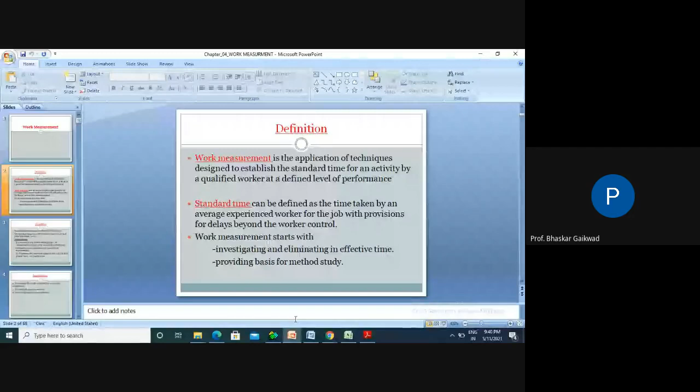At the same time, if you want to change any method of producing from raw material—like the method of manufacturing forging parts, casting parts, rolling parts, press tooling parts, etc.—if you want to change that method, here too we require certain time studies. If we save certain time, ultimately the manufacturing cost will get reduced. So this is actually the scope of work measurement and the need for time standards.

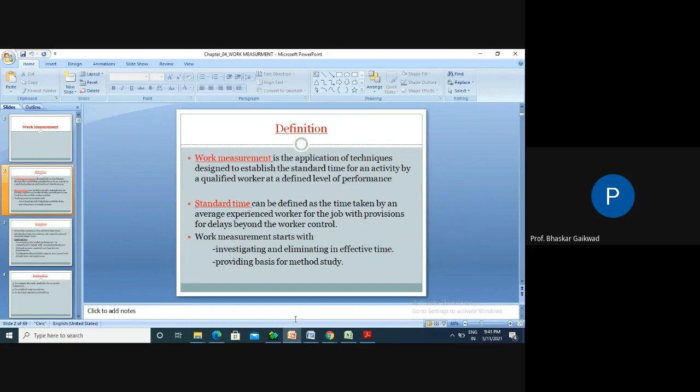Whatever explanations I have given comes under the objectives. The first objective is to reveal the existence of ineffective times, if any. Ineffective times means waste times in production which we can reduce by work measurement.

Different types of online or offline interviews will be there. In that, questions will be there. So what is actually the need of work measurement?

The main need is to decide the standard times and eliminate the ineffective times if there is any. Then second, set standard times for carrying out specific jobs and standard output levels.

So suppose you are doing any bush, rollers, pins, or shaft etc. What should be the standard time for manufacturing jobs? Suppose we have calculated 1 hour. Now within this 1 hour the job has to get complete. If it does not get complete, there is a problem with the worker or a problem with the machine, and that we have to find out. So anyhow, whatever standard time we have decided, within that standard time our production has to get complete. This is the second objective of work measurement.

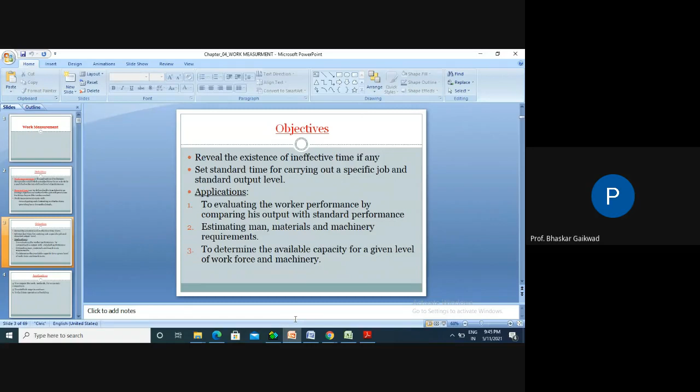Third, to determine the available capacity of a given level of workforce and machinery. The capacity of our industry or our workshop we can justify using this. Suppose any order is there for a number of shafts, and we have some standard time calculation. Then for 100 shafts, how much time is required? We will calculate that, and that is nothing but the capacity of that shop floor. These things we get through work measurement.

Then fourth, to compare work methods for economical comparison. So many work methods are there: maybe machining methods, forging methods, casting methods, pressing methods, or fabrication methods. So we can compare all these methods on the basis of economic criteria.

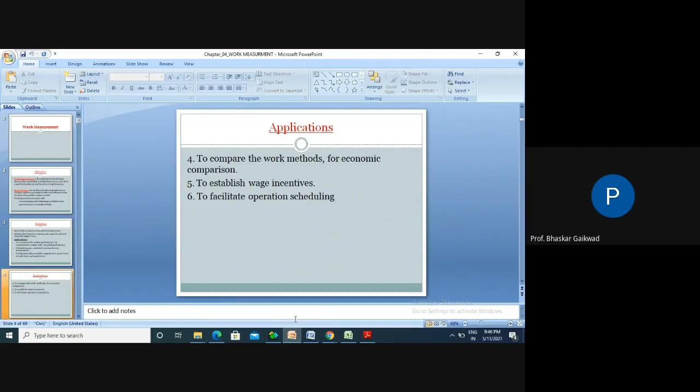Now fifth point, it is very easy to decide the incentive scheme, bonus scheme, or daily wage systems, we can make use of work measurement. Then sixth, to facilitate operation scheduling, meaning production planning and control. It is very easy if we have the work measurement technique, then production planning and control becomes very easy if you use these work measurements.

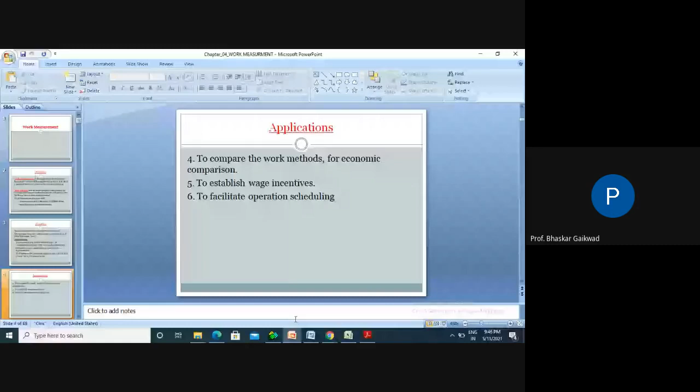Then, where to apply work measurement? It is widely used where work or part of work is repetitive. Mass production is there, repetitive means mass production. So three general criteria are there for measurable work.

First criteria: work should be identified in terms of the number of units produced by workers. So quantity here is important. Suppose we have decided the standard time, and within that time how much quantity we are going to manufacture, these things we will get.

Then second, work should be performed in a reasonable, consistent manner. There should be consistency, meaning within the afternoons or before afternoons, the same quantity should be there. Consistency in manufacturing. Volume of the work should be justifiable to perform the study and keep records.

We can justify the volume within 8 hours. How much volume will there be within the next shift? How much volume are we going to produce in the third shift? So in total, monthly, how much production volume will there be? We can justify this with the help of work measurement.

Now, the next part: the basic procedures for work measurement in industry. Suppose you are going to select any job in any industry; we have to select the job for study. After that, all relevant data related to the job is recorded with the elements of work. Suppose a job has a number of operations, maybe machining, casting, or forging operations. Whatever the present manufacturing process is, you have to record it.

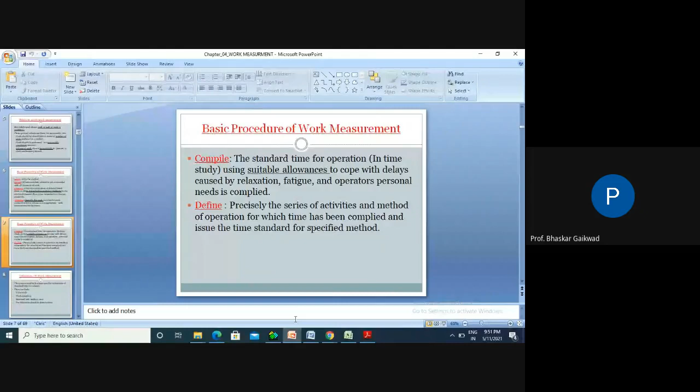Up till now we have gone through the definition, the objectives, and the basic procedures. Once again I will repeat the core concept of work measurement. Whatever is going on in the industry, it converts that work into standard times, because standard times are decided on the basis of a qualified, experienced, highly efficient person, and we compare this with other workers and expect the same time for all.

Okay. If the standard time is there, it is definitely very easy for production planning and control, cost reduction, inventory control, deciding future delivery dates, and the capacity of the plant. It is very, very important. So this is what we have seen up till now.

Next in work measurement, what are the techniques of work measurement? There are several techniques used for estimation of standard times in industry. These include time study, work sampling, standard data methods, and predetermined motion time systems. So four methods are there. Time study means we can directly use a time study watch, maybe flyback or cumulative types of watches, for measurement. The observed times we note down; this comes under time study.

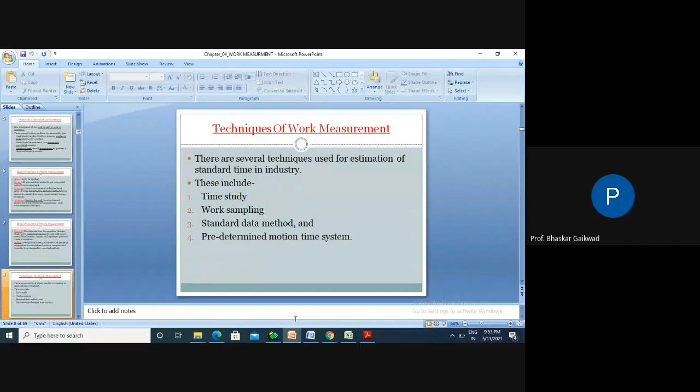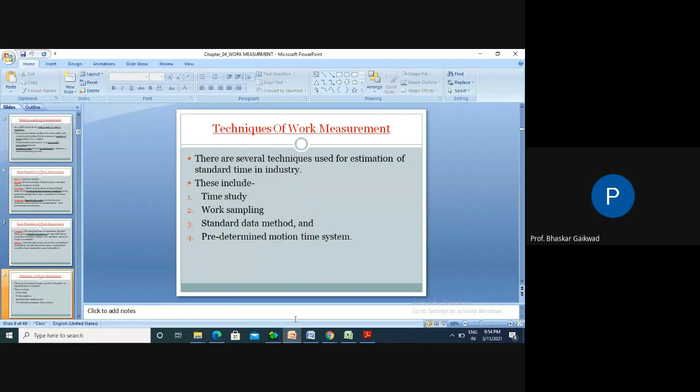Predetermined motion times means for particular motions we decide certain times, for grasping, how many seconds are required. Then after grasping, we move it and put it in the next place, how much time is there. So your hand movement or arm movement or the movement of any part of our body while working, how much time is required, we have to decide, and the same times we use again for the same types of motion activity.

Second, it is used to estimate the times to be allowed to a qualified and well-trained worker working at normal pace to complete specified tasks by using specified methods. Once again, the repetitive word is there. Always you have to remember standard times. It has been calculated on the basis of the workers' and machines' performance.

Which type of worker do we require here? Trained worker, qualified worker, good experienced worker, efficient workers. First of all, you have to get the work done by such a person, and the same thing we have to apply for other persons. This technique is based on measuring the work content of prescribed methods with allowances for fatigue, personal needs and unavoidable delays. So whatever is observed, performance rating is there. In that you can add certain allowances.

Certain allowance means which type of allowance? The time lost due to personal problems. Then time lost due to the fatigue of the workers. The time lost due to unavoidable delays. For example, in the machining condition or in the process of manufacturing, sometimes the delay happens due to power off. So that time also you have to consider while calculating the standard times.

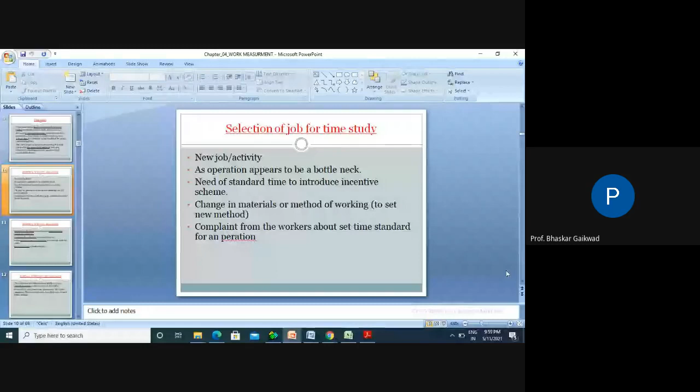The last, complaints from the workers about the set time standard for an operation. Sometimes on the shop floor there are always complaints from the workers: this is a very critical job, it is not possible to manufacture within 8 hours. Sometimes some workers feel it is a very simple job we can manufacture within 2 to 3 hours. So these opinions always will be there. So how we can normalize these types of opinions is by using this time study technique.

Then next, excessive idle times for machines or extremely low output of the machines. So suppose the manufacturing process is going on in industry, maybe a machining process, press tooling process, forging process, any process, rolling process. Sometimes there is a problem: some process is taking excessive time. So why is there actually this excessive time? If you need to analyze this, here we require the time study.

Compare the efficiency of two methods. Once again, comparison of new method and old methods. For efficiency comparison purposes, we require time study. Make preliminary investigations to carry out method study. So initially, before work measurement, there should be method study, meaning changing the old method into new methods, and while changing, time study plays a role that is

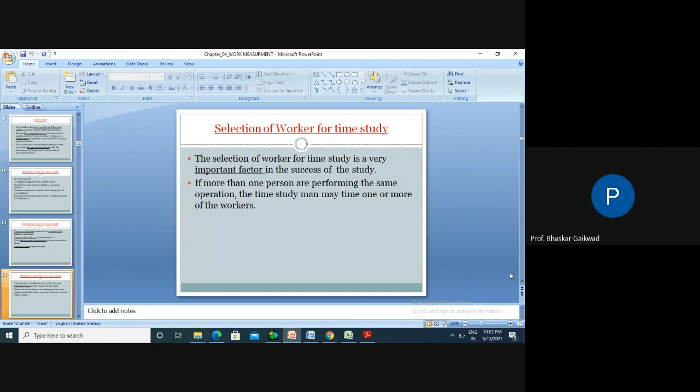The qualities in the worker on which time study should be conducted: the worker must have the necessary skill for the job. First, you can check the skill for the job. Have sufficient experience with the given method of job. So before the time study, you can get it checked. Skill is there, experience is there, average working speed is there, then knowledge of the method and purpose of study, whether that person knows or not. This is related to workers.

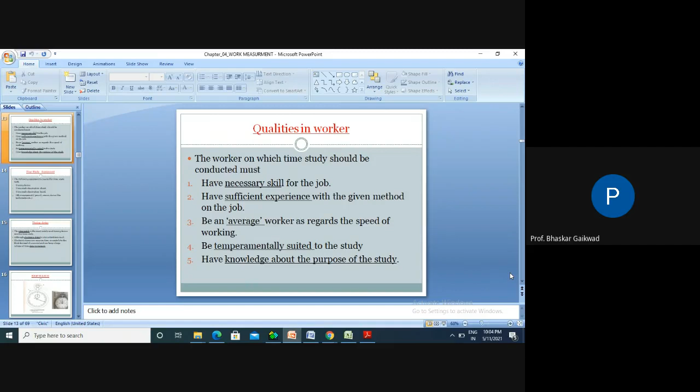Only one point here you have to remember. A time study you always have to calculate on the basis of a qualified, experienced, skilled person at 100% performance. On the basis of this, you can go for calculations. This point is given here.

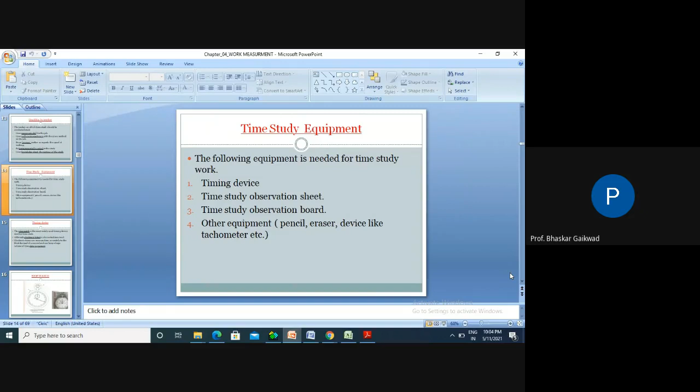Then time study equipment. Four types of equipment are normally used in industry. Timing devices, meaning watches; different types of watches are there. The time study observation sheet is there. Then a board is also there. Other writing material is there. These are very simple things. We just require a watch and one time study sheet for observation purposes. And the stopwatch is the most widely used timing device for time study.

Once again, two types of watches are used for measurement of times, and the other parts should be on the papers. Although an electronic timer is also sometimes used, sometimes digital types of watches are used. An electronic timer can measure times accurately to the third decimal of a second and can keep a large volume of data. So nowadays, instead of the moving pointer watch, digital watches are used for measurement of times in the industry.

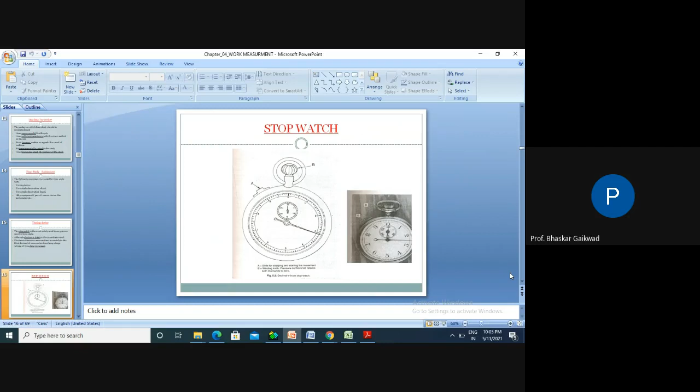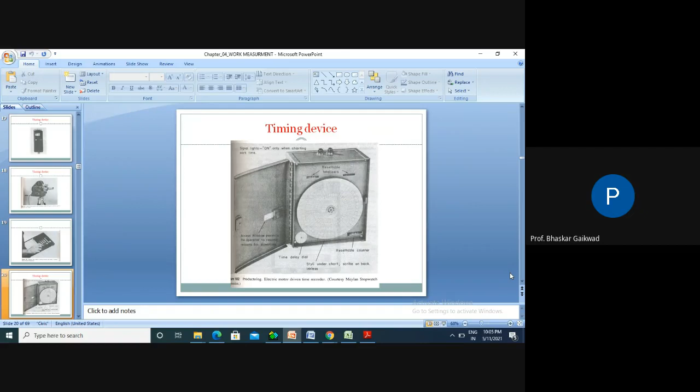And in that normal or basic time, if you add the personal allowance and contingency allowance, you will get standard time. So, timing elements: cumulative timing. In this method, the stopwatch runs continuously throughout the study. So here, cumulative timing is that once the study starts, the stopwatch runs continuously throughout the study. The watch is started at the first element of the work cycle and not stopped until the whole study is completed.

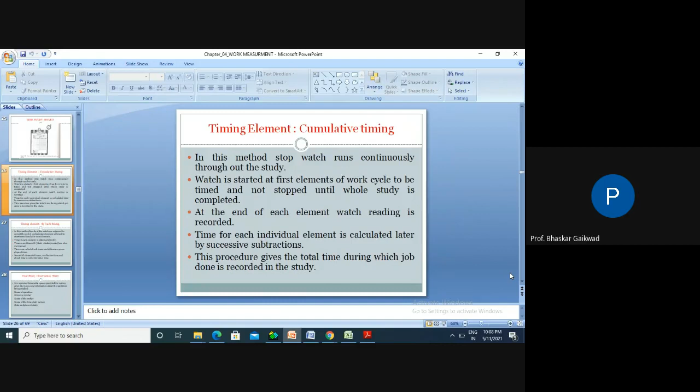Flyback means once the work starts and once it gets finished, the watch will come back to zero; this is fly back. Suppose any operation is there requiring 2 to 3 minutes, then once we press the button, the pointer will move 2 to 3 minutes, and there it will get stopped and return back to zero. So this is the flyback timing method.

Then the observation sheet is there. Now you can make it as per your convenience: what is the operation, drawing number, name of the worker, time study person, date, place. These are the common things because each time a time study is going on, the present data, meaning which shop, which department you conducted the study in, for which operation, which drawing, which type of worker you made this time study on, date and place should be there. It should be contained in the work study.

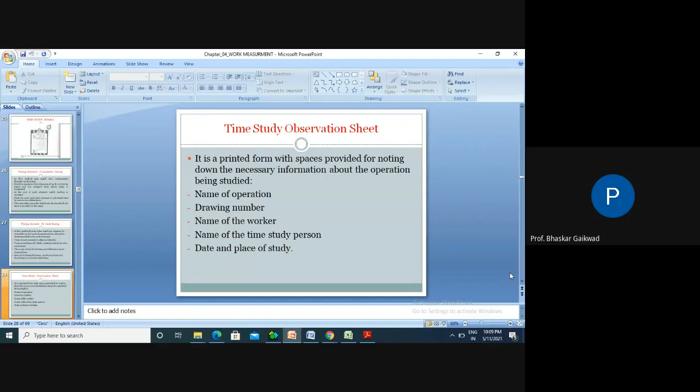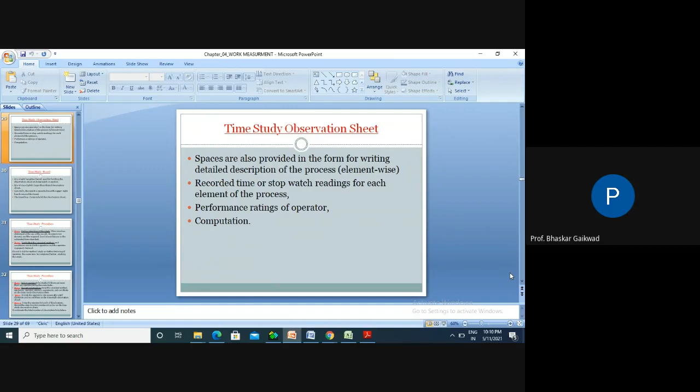Now here the observation sheet, same thing is there. Two or three slides I have shown there. Observation sheet is there. Okay. Then the time study board is there. Whenever observed time is taken by the stopwatch, you can put it on that board, and ultimately you can calculate the total time for this. This is the time study board. Always in every department, near the head of that department, this time study board is just like our whiteboard.

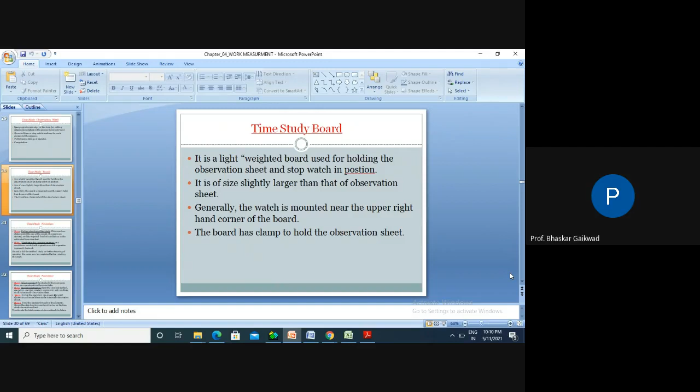Now procedures. What is the procedure for time study? Method study procedures we have seen. A similar type of process we can use here for time study. So first is define the object of the study, involving a statement of the result and precision, the required level of confidence and estimated time standards. So here, define the objective. Why are we going to conduct the time study? Because there are problems about delivery dates, wastage of time, the workers' wage systems, incentives, and a lack of mental stability in the worker. For this purpose, we have to think where to estimate the times.

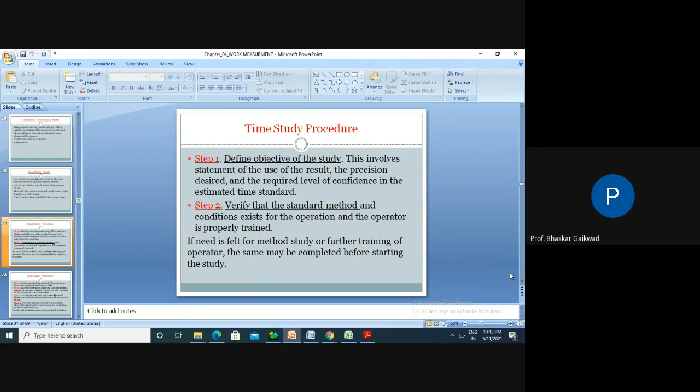Then second, verify the standard method and conditions exist for the operation and the operator is properly trained. If need is felt for method study or further training of operators, it should be completed before starting the time study. So here, as usual, is our recording technique from method study. Same thing is there for step 2. Step 3 is select the operator to study if there is more than one operator doing the same task. On which basis will you select operators? Skill, qualification, experience; these will be there.

Step 4, record information about the standard method and operator. This is the recording technique. Then fifth is divide the operation into elements, and for each element you have to decide the time. The time for each element is recorded over a few cycles. So everything you have to put on that board for each element of the work, and after that you have to make the sum of this, which is used for calculation of normal or basic time.

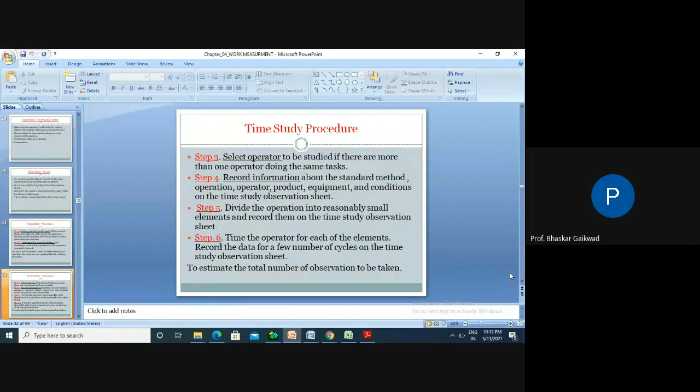Then seventh, collect and record data for the required number of cycles by timing and rating operators. So what data is required? The observed times data is required, and rating means performance rating, meaning whether the level of that operator is below 100

or above 100. Step number 8, calculate representative watch times for each element operation, multiply by the rating factor, meaning observed times into the rating. Here this is the formula given: normal time, also called basic time, is equal to observed time into the rating factor.

Observed times, how will you get them? By stopwatch study you will get observed time, and rating for a qualified experienced person is 100% performance. This is in percentage, 100 divided by 100 is 1, like this. Calculate normal time, and to this normal time we can add personal allowance or contingency allowance, and you will get the standard time.

Step number 9, determine the allowance for fatigue and various allowances. So there are 4 to 5 types of allowances. Among them, personal allowance and contingency allowance both play important roles in the standard time calculation. Policy allowance will not be considered. This is the management allowance for work measurement.

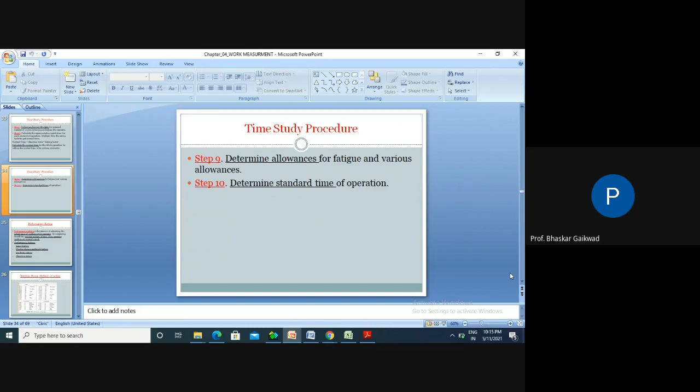And whenever the next production comes, you can make the worksheet, you can make the production planning, and manufacture the same pin head within 2 minutes, because it is a standard calculation.

Performance rating. So what is the performance rating? Just now we discussed observed times into the performance rating. What is that performance rating? Performance rating is the process of adjusting the actual pace of working of an operator by comparing it with a mental picture of the pace of an operator working at normal speed, meaning speed of working using his skill, qualification, and experience.

The time a person normally works at is supposed to be 100%. Meaning the speed at which a qualified, experienced, and highly skilled person works is supposed to be 100% performance.

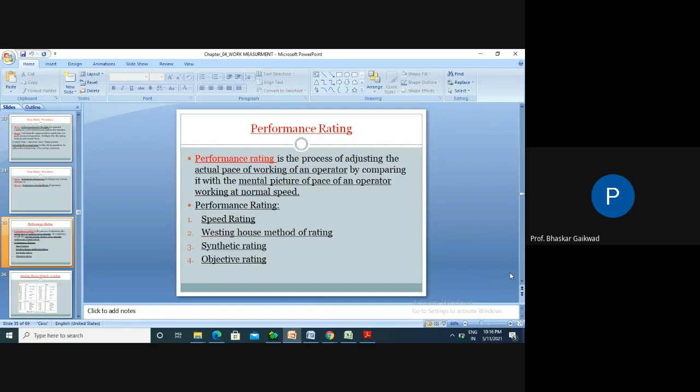So performance rating depends upon these four factors: speed rating, the Westinghouse method of rating, synthetic rating, and objective rating. This is not part of our syllabus, but anyhow you have to concentrate on the performance based upon skill, qualification and experience of the worker. So some methods are there which are not part of our syllabus. Let us see the allowances.

Allowance means additional time with respect to the calculated time, for personal problems, machine maintenance problems, tool wear problems, power off problems, and management problems. So in order to compensate for all these problems, certain time we have to give to the workers.

For example, suppose at 8 o'clock in the morning one shift starts. After 9:30 the power goes off. So how much time is lost? Maybe 5 or 10 minutes. This 5 or 10 minutes you have to consider. This is the contingency. Sometimes after 2 or 3 hours, the worker will go for personal leave. Then we have to add the relaxation allowance.

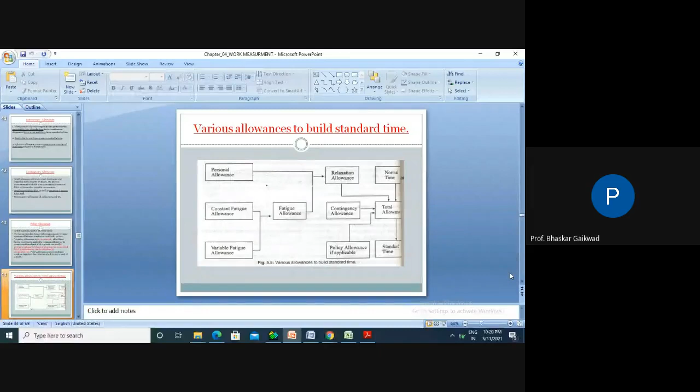And the policy allowance, this is management allowance for increment purpose, incentive purpose. So here is one chart given. In short, you have to remember personal allowance to fulfill personal need, contingency allowance, power failure, for example, interference due to machine breakdowns, and policy allowance. If management wants to introduce incentive scheme, bonus scheme, additional payments, it requires the policy allowance, but policy allowance will not be considered in the standard time calculation.

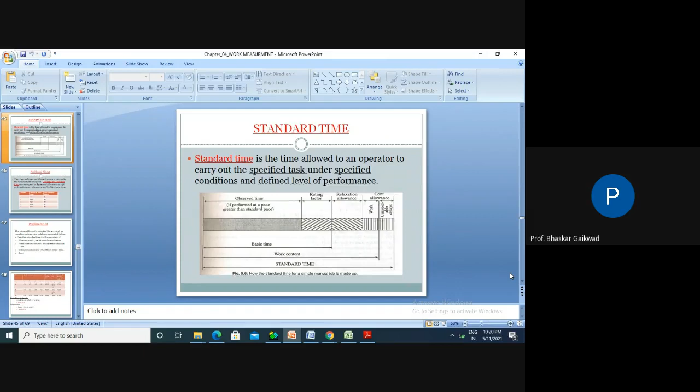So this is standard time. By figure, it is given: first observed time by stopwatch into rating factor plus allowances, it will become standard time. So here are some problems already we have solved. Whenever these type of problems are there, observed time into performance rating. For example, 0.2 observed time is there into 85 divided by 100.

You will get this normal time or basic time, and as a percentage of this you can add the contingency allowance or your personal allowance. Here it is 15%, means suppose normal time is 10 minutes. 10 into 15 divided by 100, this is your personal allowance. So like this you can calculate the standard time.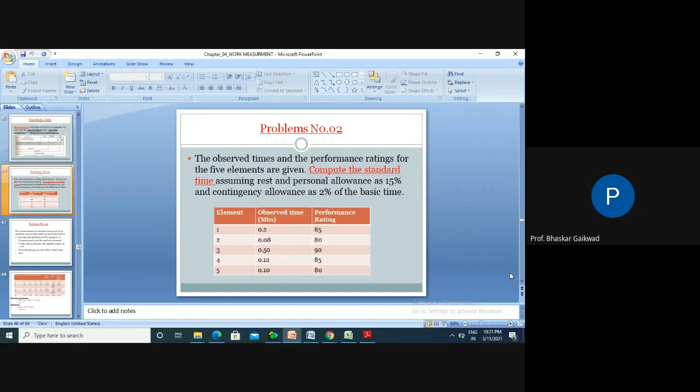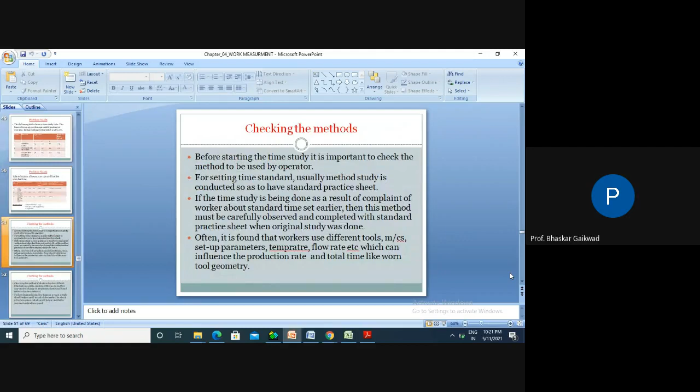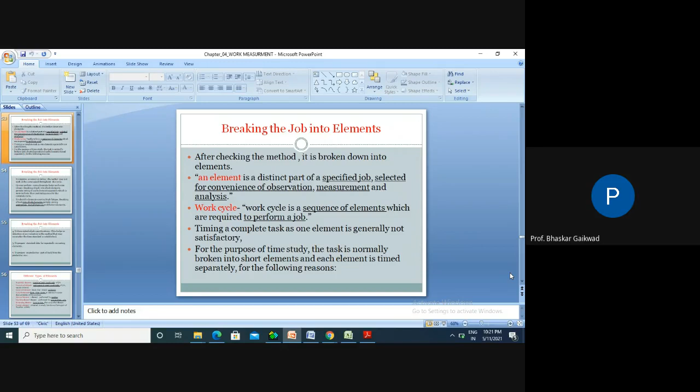Second problem is also the same, standard time calculation. And checking methods as per standard times, checking points are there: breaking job into elements, so many elements already we have discussed while calculating the work measurement. Each element you have to get separately and assign the standard time by using the time, and total time once one job will complete from start to end, this is supposed to be considered cycle time, and there is a need to reduce the cycle time in this manufacturing process.

Different types of elements are there: repetitive elements, constant elements, manual elements, so many elements are there, but anyhow you have to remember where actually the time will get wasted in each element, that you have to consider.

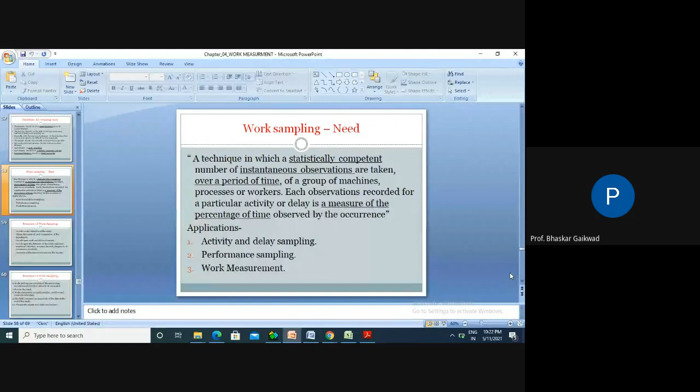Then the work sampling, you know this is a technique, a statistical technique. Whenever mass production is there, you have to make use of this work sampling technique. Statistical method, simple part is there. What is work sampling, where we can use it, and how to calculate the number of observations. This formula you can use, number of observations at confidence level.

So let's solve one numerical problem based on this. N equals 4(1-P)/(A^2 P), where A is the accuracy and P is the activity, given in percentage. So here's the number of observations. Suppose mass production is there, how much observation will it take? What is the confidence level and what is the limit of accuracy? Plus minus 2, confidence level 95 you can put here, and activity percentage maybe 3 divided by 100, like this, and you can calculate the number of observations. So this technique is used for mass production purposes.

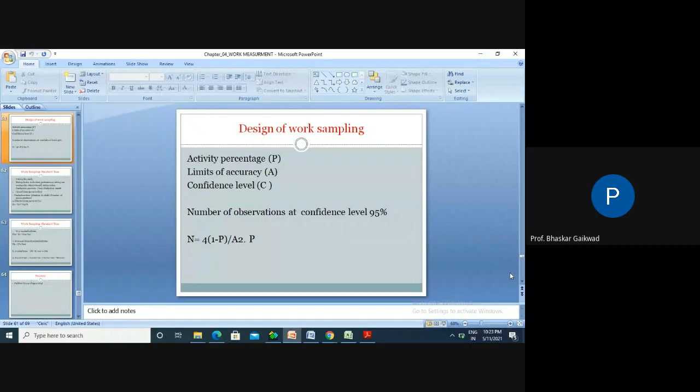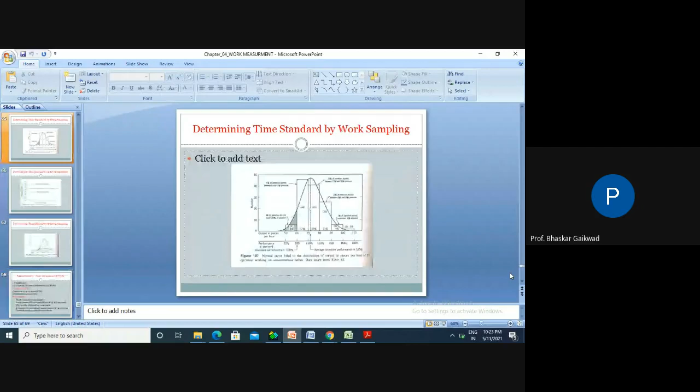So some of these problems, this chart, need not be remembered because it is not part of your syllabus. The chart is there. Now the last part, that is predetermined motion study. Some of the motions of our body organs have been measured by using the camera. So suppose one hand is moving to catch a job, how much time is required? After lifting the job, it comes back to the origin, how much time? So each motion's time has been standardized. That's why it is called predetermined time study.